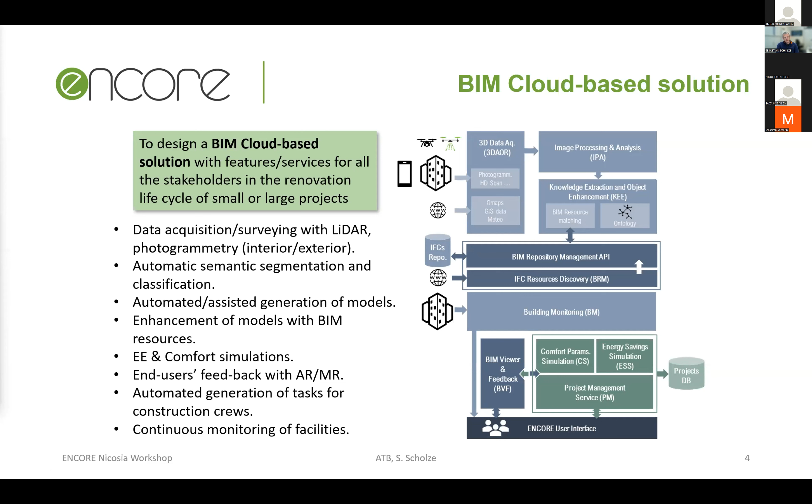So on the right side, you see the conceptual components that we wanted to address. And then in the last 3 years, we came up with an architecture. So we have a layered architecture. On the bottom, you see several data sources. So BIM objects, data from the drones, photogrammetry and LiDAR information, sensory information from the building, data from weather stations, but also online available data like Google Maps to get information from this.

The next layer is processing this raw data information. So to be able from this photogrammetry and LiDAR to create point clouds and photos and use these to create a BIM model, and also use the sensory information to enhance these BIM models. Then in this ENCORE engine layer, we are working on these data sets to get more meaningful data. And then on top, we have all these applications that I already mentioned on the slide before.

Okay, that's some sort of a software architecture, but renovating buildings is a quite complex process, so we also came up with an ENCORE workflow on how a renovation project should work. And you can see this here. So we are starting with creating a renovation project. Then you have to generate or add a building model, assess energy and comfort before renovation, then define renovation alternatives, and so on.

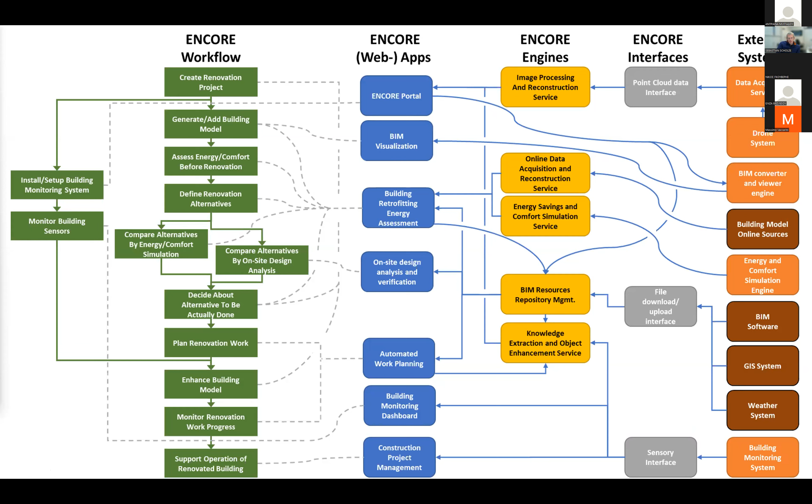And in the next slides, I will show you this ENCORE portal. That's the entry point for the integrated ENCORE solution. So it's a web-based solution. You can access it via any web browser, and then you can sign in. And the first thing that you see is the overview of your current renovation projects.

So for example, we are now in this project overview. The building monitoring is a building monitoring solution so that you can get live data from building sensors. This energy and comfort simulation can be executed from here. You can do a design analysis, the work planning, the monitoring, and this building operation support.

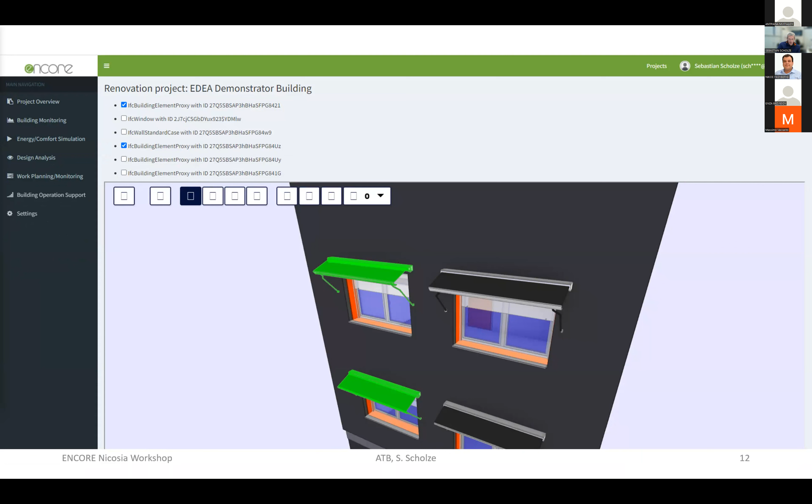If you have done this, in the background, there's an engine called Knowledge Extraction and Object Enhancement Service, and this is running continuously and trying to enhance these already existing IFC files, so the BIM model, and we are adding their semantic information. So, for example, we are trying to attach or connect installed sensors in the building with the objects to be renovated, and the result looks quite similar to

the one before. But what you can see here in these tags, that on top we have added here a sensor, so you know that with these objects some sensors are connected, and that's I think quite nice, because this is automatically done. So there's no need to manually update this information. Okay, that's the main part for this building.

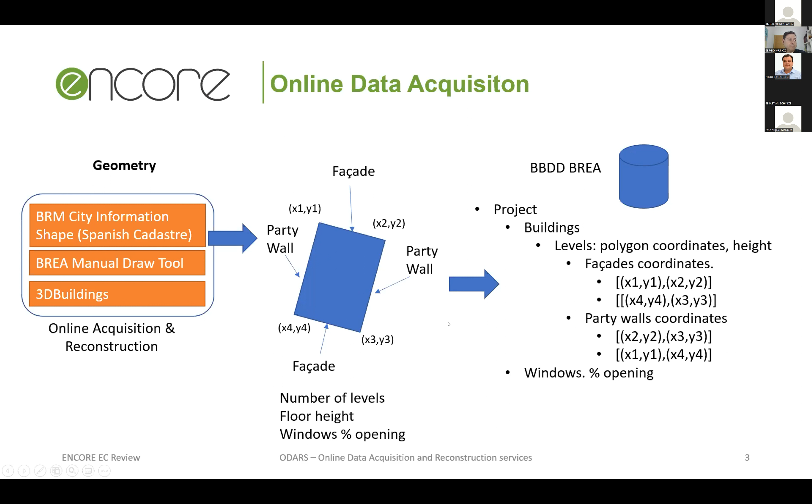So we need to take all the points of each facade, of each wall of the envelope. We need the information about the number of floors. We need the information about the floor height. We need to know the areas of the windows in each facade in order to create the geometry of our building information model. So I'm going to explain very briefly which information we have in each one of these sources.

So in the case of the Spanish cadastre, we have many shape files, one per municipality. We can take information about the polygon of each floor and the height of the building, and other interesting information like the year of construction, if there are some levels underground, for example, and information about the surrounding buildings. So here I'm showing you our database where we have stored the shape files of many towns in Spain.

So the second online source is 3D Buildings. It's a global database of buildings with different levels of detail depending on the country and cities. There are some cities and some countries with a good level of detail of the buildings, but in other cities or other parts of some cities, we don't have, for example, the information on the number of floors of the building. This is an example of the information that 3D Buildings has for Nicosia.

And finally, the last option is just to let the user draw manually using Google Maps as reference. He can draw the envelope of the building, indicate the floor height or the number of floors, indicate if a wall is a facade or a party wall, or add a courtyard, for example. So that's what we can do. We take this information in order to create the 3D model, extruding the floor polygon, taking into account the floor height.

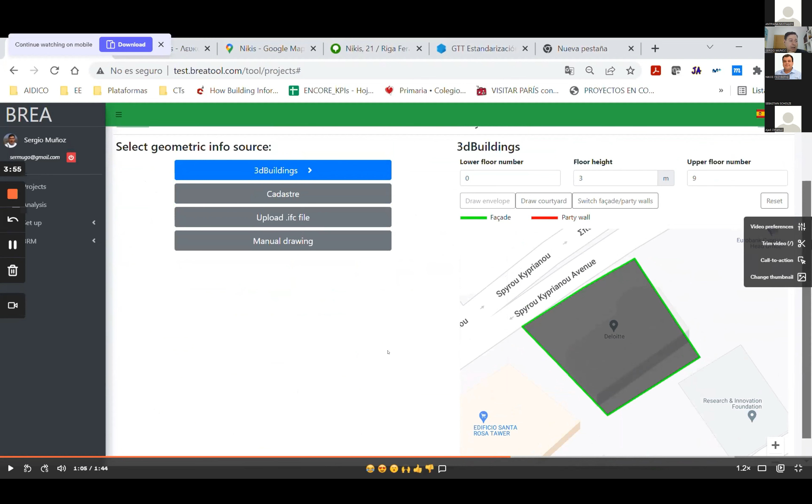Okay, so in this case, I select 3D Buildings as the online source. As you can see, the geometry provided by 3D Buildings is a little bit different than in the map. But I have the information about the number of floors of that building. So I assume that this geometry is correct, but if not, I can reset and draw manually. This is another part of the process that I will explain later, because we need to give additional information to our building information model. But the important thing is that finally we have this 3D building model for that building.

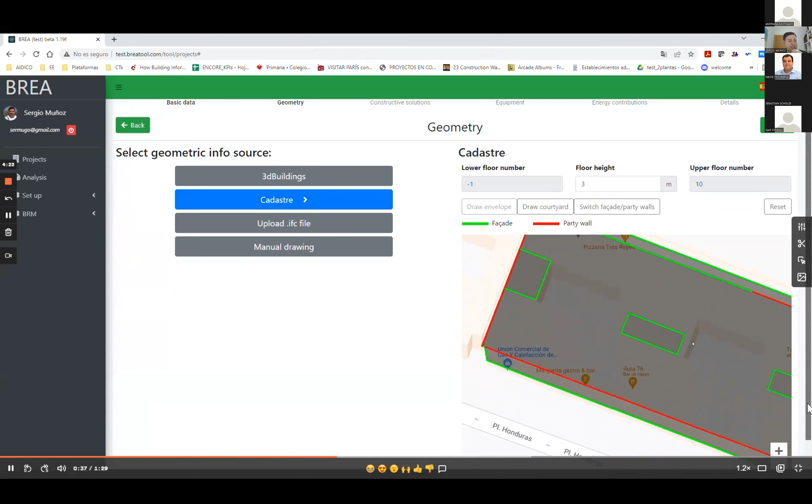So now I'm going to show you another example. In this case, we are going to use the Spanish cadastre. So I'm introducing an address in Valencia, in Spain, my city. Okay, I add some information about the climatic file. And here I select as online source the Spanish cadastre. And I get this information about the envelope. But for example, I don't get any information about the courtyard.

So I'm going to add a courtyard to this building. I have to specify on which floor the courtyard starts. So this is the courtyard. Okay, this is the same process to specify the technical requirements for the building. And finally, I have my 3D building information model for that building.

And finally, another example. In this case, I don't get information from 3D Buildings; it's another building in Nicosia. The address is Nikis 21. And I'm going to draw manually because I don't get information from the 3D Buildings API. But it's quite simple because in this case, I can use Google Maps as reference in order to draw the envelope of the building.

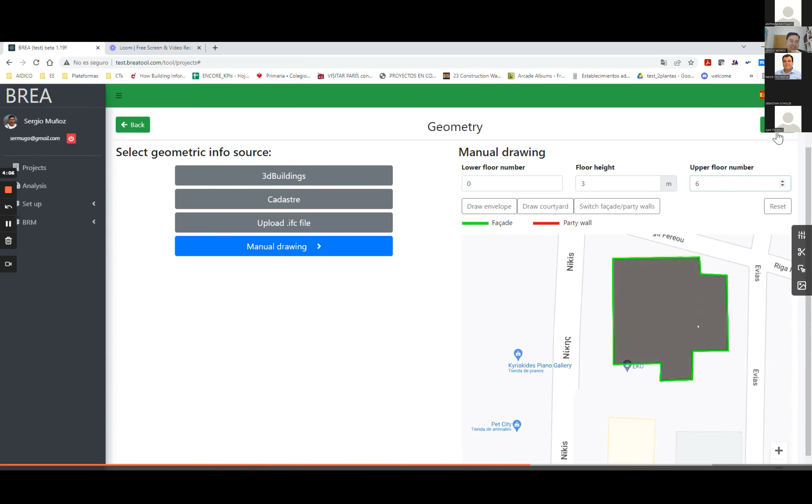I can specify the number of floors, for example, 6. I don't know if it has 6. I say which are the constructive solutions and the technical equipment of the building. And finally, I have the building information model. So let me.

So that's really all. What I wanted to explain to you is that this is possible because for making the energy assessment of the building it is enough to have the building envelope. We don't need information about all the internal walls of the building, for example. It's enough with the envelope of the building, and these online sources give us enough information to create this type of building information model.

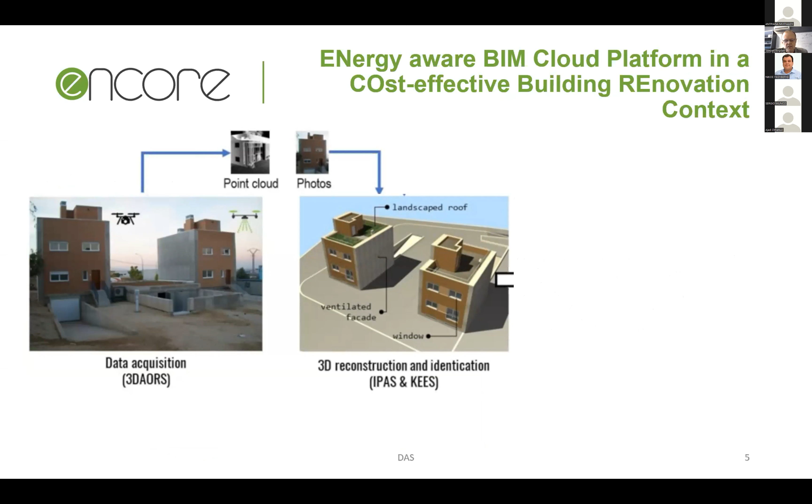So with our UAVs, as I will show you later on, we also use Google Maps and cadastre data. We find a building that we would like to scan with the UAVs. We are using LIDAR systems. Then we just mark points on the map, and based on those points, our vehicles fly around the building, collect data, and then those data are used to make 3D models. So this is actually the pipeline of ENCORE.

Now, in more detail, as Sergio already described, within Google Maps and cadastre, we find the building that we would like to scan and build a point cloud of. And many times the cadastre, for example here in Croatia, doesn't have as many details as the cadastre in Spain. For example, we don't know about the floors and much information is missing.

What we actually have, we have just layout of the building. And this is the first step. Our application just gets data from GMaps, the coordinates of the building, and those data are fused with the data from Cadastre. And then the operator just pinpoints waypoints that should be flown by vehicles in order to follow a particular trajectory.

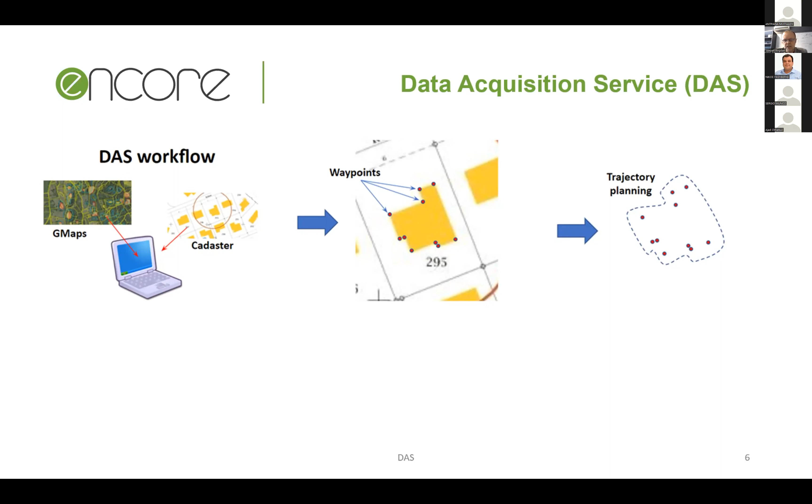Once those waypoints are set, then our system plans trajectory for UAVs, for drones, and we would like to do the scanning of the building with 2 or 3 UAVs. So not just with a single one, but in order to speed up the process, we use 2 or 3 UAVs, and our system plans those trajectories.

Then once trajectories are completed, vehicles autonomously take off, as you will see later on video clips that I will share with you. And all trajectories and all scanning is done autonomously without piloting the vehicles. Of course, there is always an operator there as a person that should take care if something goes wrong. If there is some malfunctioning of the system, then he or she takes over the UAV.

But if everything goes as it was planned, then at the end, the system would provide data sets with the point clouds that are later on in the ENCORE pipeline used for building a 3D model. Here are the components of the system. As I already said, there is a ground station which runs a human-machine interface, which is used by the operator to put all parameters of the system.

We have a communication part. We can communicate with UAVs by Wi-Fi, and also we are able to send images and point clouds over 4G or 5G. And we have 3 UAVs. This is the maximum number of UAVs. Of course, if there are some small buildings, all missions could be done also with a single UAV.

And on the UAV, we have a small onboard computer that actually calculates trajectory, plans wall following controller, attitude, and controls the vehicle. And then hardware, this is the vehicle that we are using. Here are the details. If anybody is interested, I can share with you later on or send you by email. It's a dedicated vehicle built for this purpose, equipped with all necessary sensors in order to provide autonomous flight of the vehicle. Payload could be up to 2 kilos.

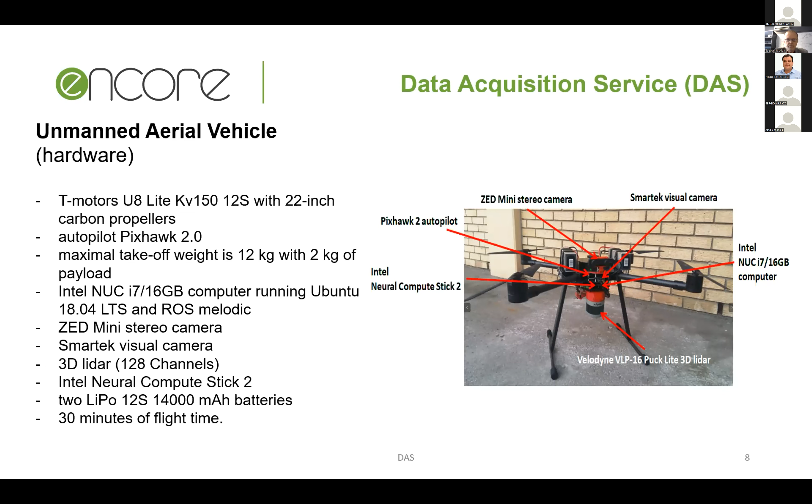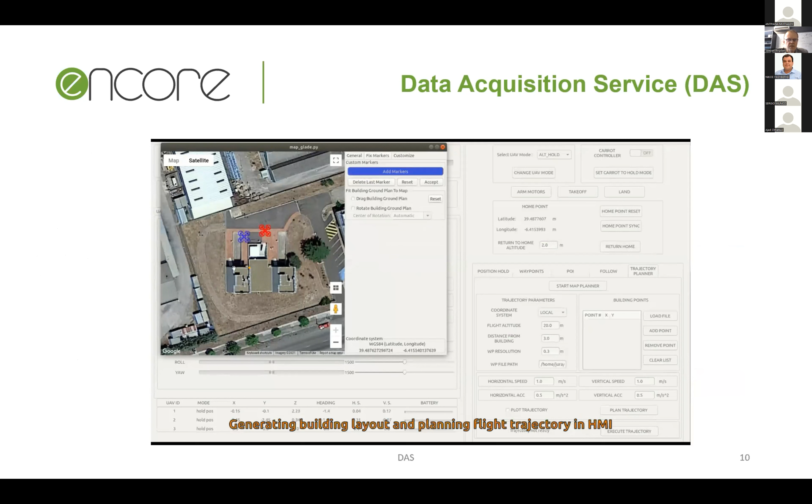And this is the process that I just explained with the human-machine interface. So as you can see, this is the building in Spain, in Cáceres. Now the operator sets 4 orange points around the building, and those points go to the trajectory planner. Then trajectories are planned. We have green, red, and blue UAV, and all data about position and orientation of UAVs are there. Once trajectories are calculated, as you can see, we have a blue and red one.

So 2 vehicles currently are scanning the building, and the operator could change the point of view, check if those trajectories are executed as planned. And also on another screen, the operator could see animation of the UAV that flies around the building. Here you can see how this blue vehicle is moving around the building following trajectory, and this red one is preparing for execution. And now both vehicles scan the building on opposite sides in order not to collide with each other.

So this is the operator's panel, and this is how the operator can check the status of the system. Also all numerical data, position of the vehicle, speed of the vehicle, GPS coordinates, everything is there on the screen, status of the battery, etc. Then, when this scanning is completed, also here you can see live how this looks from the ground station point of view. Blue and red vehicles. So the blue one just went behind the building, and the red one is over here.

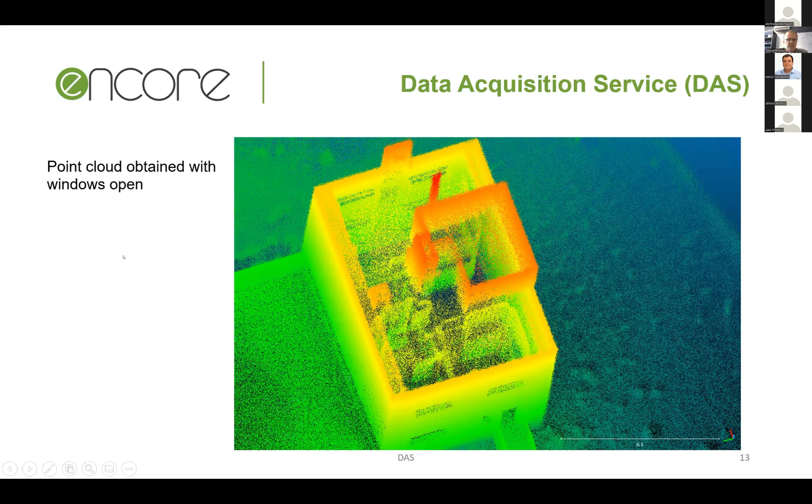And this is data that, after the mission is completed, the operator could receive, and then he or she could check if the precision of the following was okay. If it was not, for example, if it was poor weather, windy conditions, then he or she could repeat the procedure and make another scan.

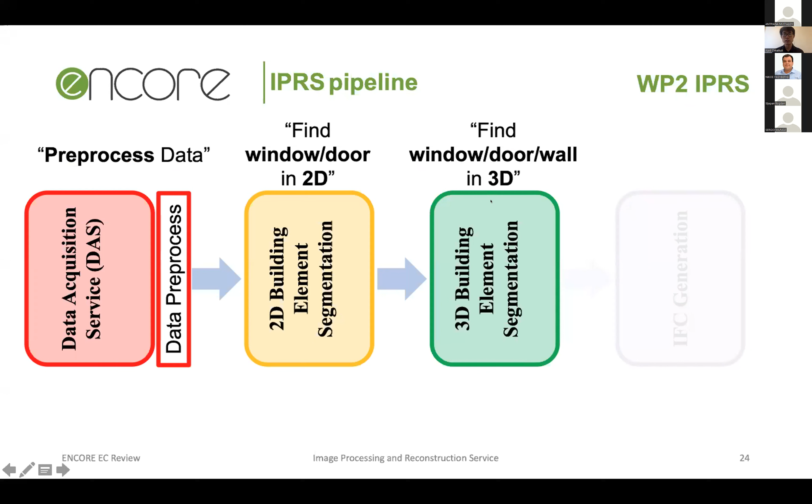The next module is the 3D building element semantic segmentation. The aim is to find the windows, the doors and the walls in 3D space. The techniques we use here are 2D to 3D mapping and 3D plane segmentation. In the 2D to 3D mapping, we back-project the 2D images segmented in the last module to 3D space to find the windows and the doors in the 3D point cloud. In our final full prototype, we already added the wall class, so we can also cluster the walls in 3D space.

For the walls, we have an additional technique, 3D plane segmentation, which aims at segmenting the planar parts of the 3D point cloud. So we can also exploit this technique to get the roof and the walls in 3D.

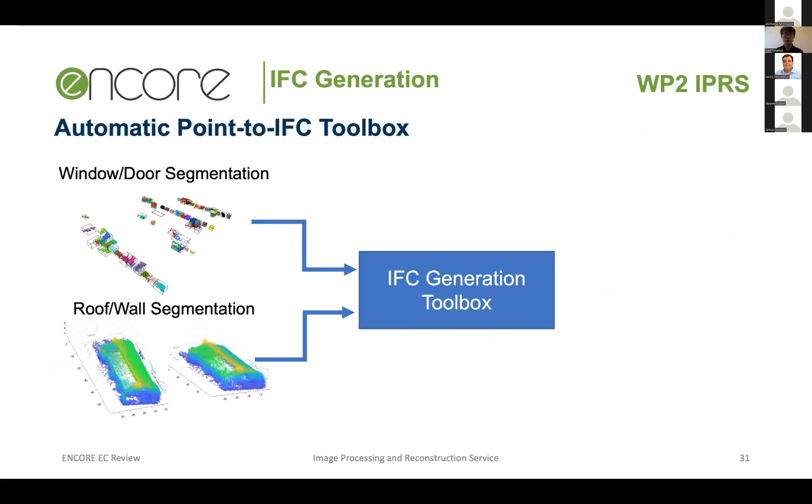In the final part, the IFC generation part, we include our segmented elements of the 3D point clouds, for example the windows, the doors and the walls in 3D space, and we input them into the IFC generation toolbox. Finally, we get the final IFC model automatically. It's the first automatic point-to-IFC toolbox, developed by our team.

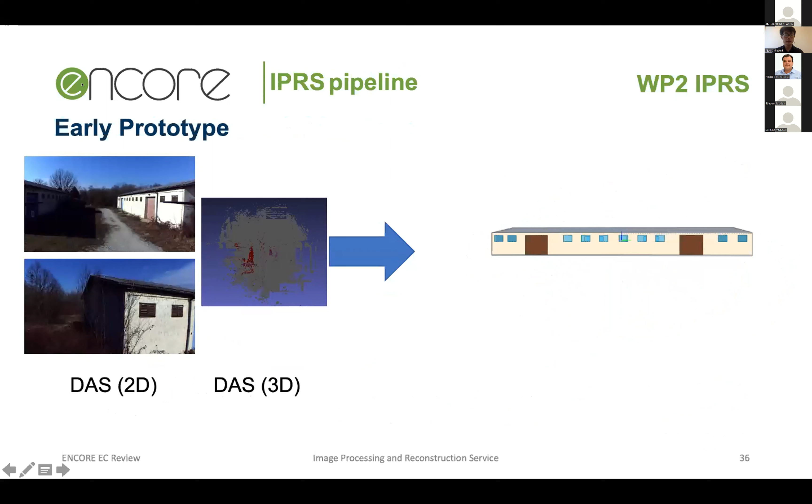And finally, we get the whole pipeline, which can receive the 2D images and 3D point clouds from the University of Zagreb team and produce the final IFC model. This is from the different buildings. In the full prototype, we verified our pipeline on the dataset collected from our testing building in Spain.

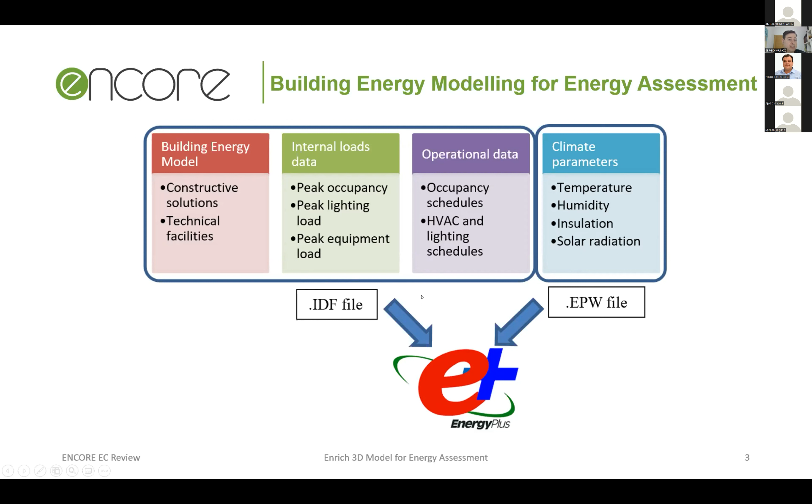So which type of information do we need? We have tried to be efficient in that way, and based on the European standard 17412, level of information needed, we have defined for each type of element which level of accuracy, with which detail, if we need the location, if we need alphanumeric information. So the level of accuracy for geometric information is different from the level of accuracy for the alphanumeric information.

Until now, we have information about the constructive solution, about the walls, the windows, and the floors, but only geometric information. So we have to enrich this information with the type of elements and some thermal properties. And additionally, we need to add to our model information related to the heating, the cooling, and the lighting systems. We don't need the geometry of these elements, but we need to know which type of facilities, and we need to know the performance or the efficiency power.

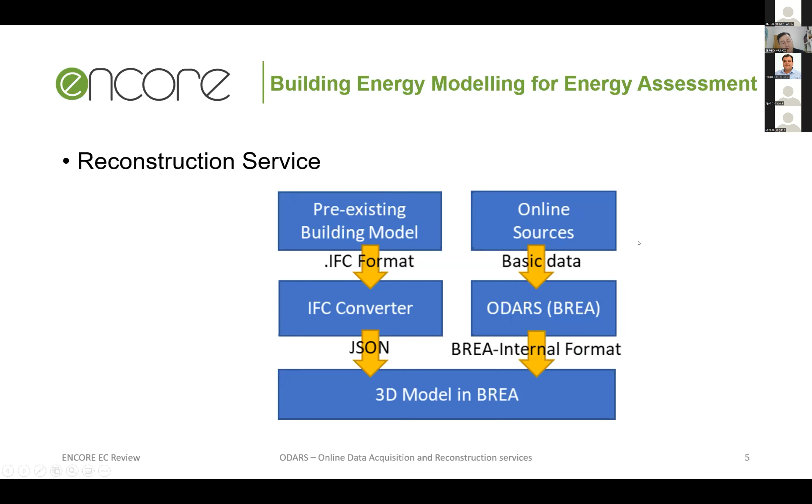So first, we have to convert the geometry from these IFC models to IDF, because IDF is the format that the EnergyPlus calculation engine uses. In this case it has been the people from the University of La Laguna, who will make a presentation later on, who developed this service, which takes the information from an IFC file in order to convert it to an IDF file. It takes the information from the envelope of the building, from the external walls, and from each slab of each floor, and converts it into the IDF structure.

As I told you before, we additionally need to add which type of materials, which type of walls, which type of windows, which type of heating or cooling technical facilities. So we have developed a database of BIM objects, which we can use to find which elements of the database are appropriate for our building. For example, regarding the constructive elements, we have a big database with walls, windows, roofs and slabs. Here we can see one of the facades of our database with all the layers, with the thermal and physical properties for each layer.

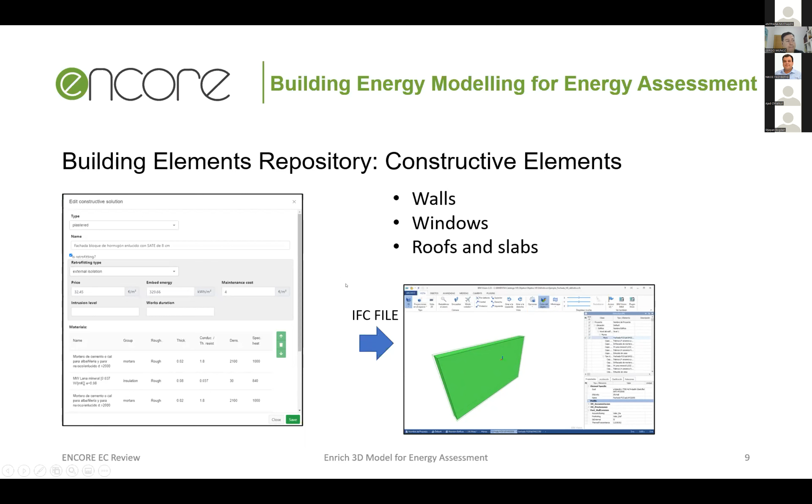Because we have a good database of different materials for walls, but for glazing too. And we have another database for technical facilities. It includes heating equipment, cooling, lighting, domestic hot water, ventilation, and building automation systems.

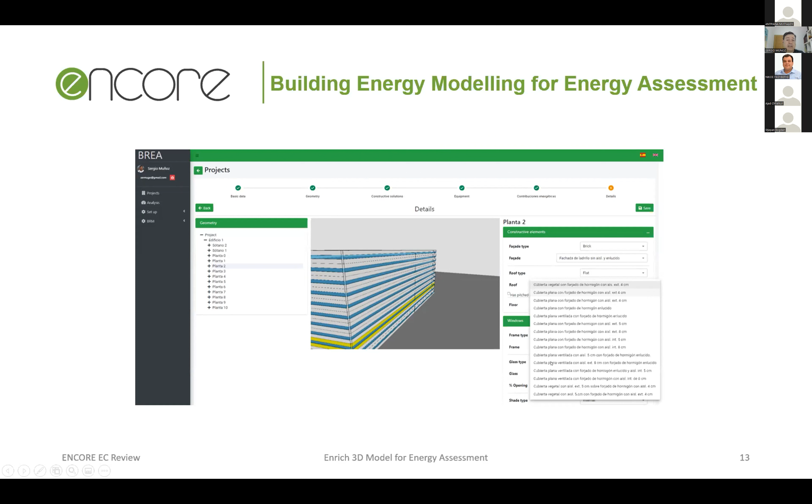So what we have to do, once we have converted the geometry to IDF format, is to select from our database the type of facade, the type of roofs, the type of windows, and the same for the technical equipment, in order to finally get the building energy model, which has not only the geometry information, but also information about the constructive elements for each floor and the technical facilities. So we can create the IDF file containing all this information to make the energy assessment that we will explain later in another presentation.

So I will try to show you very quickly two demos. I think I have to share this screen. So, okay, I created this geometry previously, but now here on the left side I can select the different floors, and on the right side I can select the different types of walls for each type of facade, for example. And later on, I just want to show you that I created the IDF file containing all this information. Okay, this is the file.

So now the second example. In this case, the geometry comes from an IFC file. This example is in Cáceres, in Spain. So I locate it on the map. And for the geometry, I select to upload an IFC file. Okay, this is the 2D plan for this building.

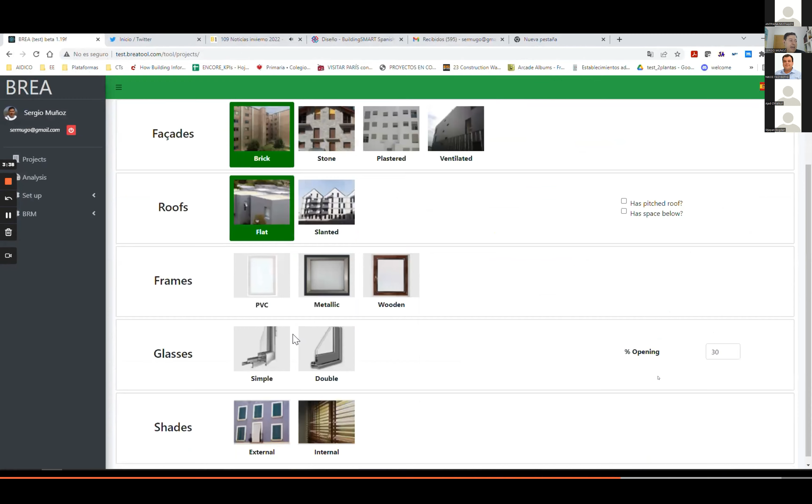In this case, I know that some external walls are not facades, they are party walls. So I'm going to manually select these ones and change them from facade to party walls. Okay, it's the last one, that's okay. And this is how I select, for example, the type of facade, the type of windows, and the same for the technical equipment.

Okay, this is the final result for the building energy model, not only geometry, so it includes these elements. And it was compared with the IFC file, opened in a BIM viewer. So later on, we will be able to make the energy assessment of the existing building.

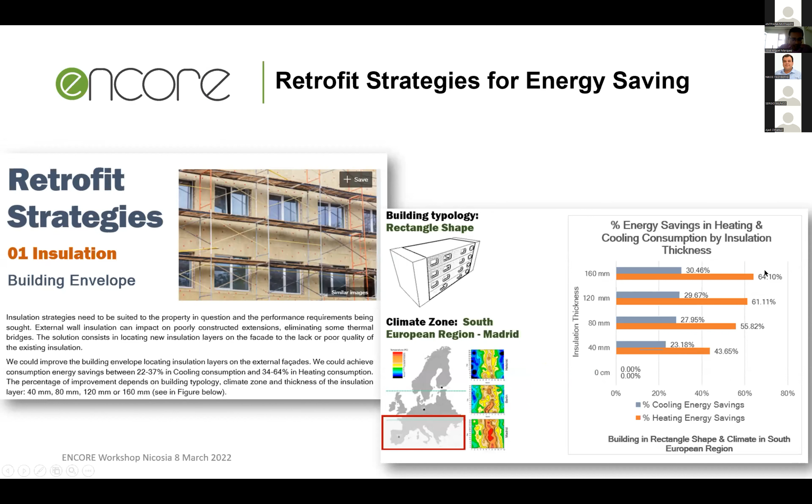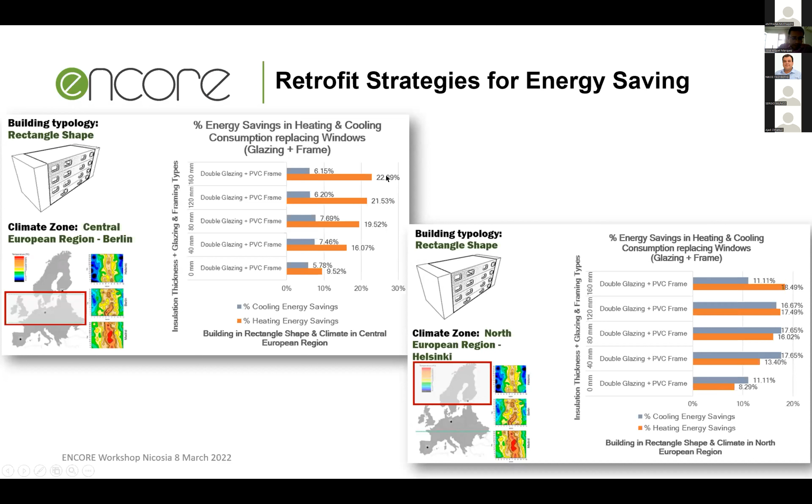In relation to the addition of external insulation in the building, here in Southern Europe, improvements between 40 and 64% are obtained, and between 35 and 50% in the case of Central and Northern Europe. The effects of window replacement depend on the insulation level in the building. In Southern Europe, replacing single glazing with double glazing leads to a heating improvement between 10 and 28%, more or less. And in Central and Northern Europe, between 8, here you can see, and 22%. The cooling improvements in these areas are not representative because, as mentioned before, there is no real demand of cooling in these places.

The combination of the two previous strategies offers improvements of 70% at maximum insulation level and almost 50% at minimum insulation level in Southern Europe. And these values range from 40 to 60% in Central and Northern Europe. Incorporating window shades in Southern Europe offers a maximum cooling improvement of 16%.

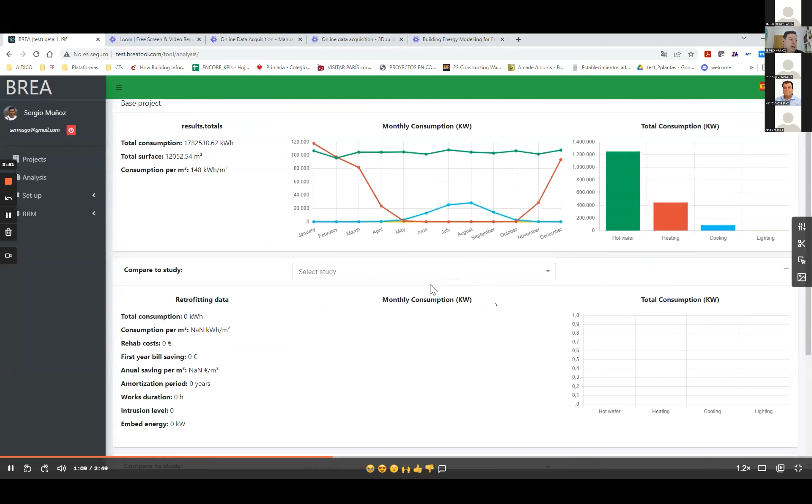So I'm going to replace the hot water type. It's an electric water heater, but I'm going to introduce another electric water heater a little bit more efficient, and I'm going to replace the lighting system by LEDs. So now I'm going to make the simulation. It takes a few seconds, and it depends on the complexity of the geometry of the building. That's not too complex, so it takes a few seconds.

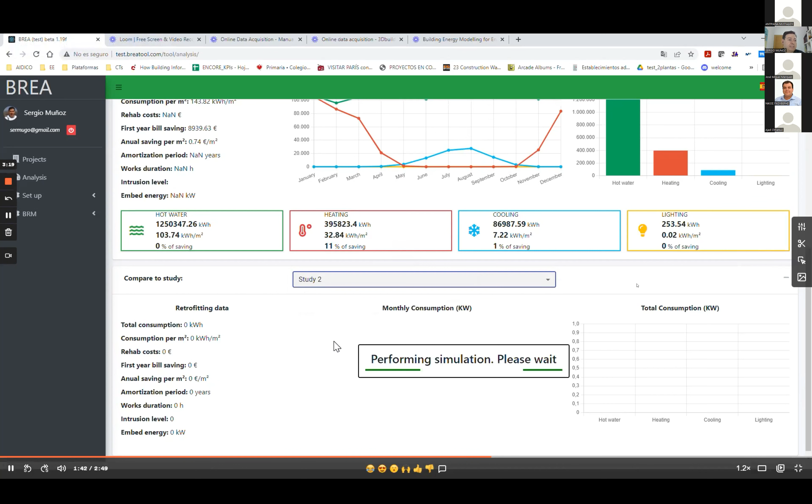So this is the case of study one, I've only improved the insulation of the facades. So I have 11% of savings in heating consumption. And in study two, I should have some improvements in the lighting and in the hot water consumption. In the case of lighting, I have 11% of savings, but in the case of hot water, I have very little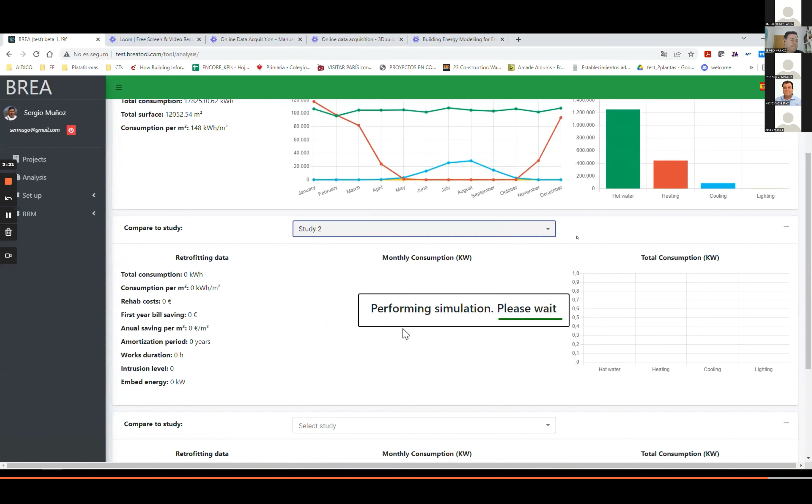savings. So I'm going to make another attempt, just editing this study two, and I'm going to replace the electric water heater by a domestic hot water condensing boiler, in order to see, using this more efficient equipment, which is the impact. So I make another simulation. Okay, in this case, it's 4% of saving in the hot water.

So we aim to give additional information relating to the payback or the works' duration. We have some information in our database, but we have to fill our database with some missing information about all the possibilities to give a complete report about the impact of each retrofitting study.

And that's all from my side in order to show you how we can quickly create different studies with different types of strategies in the passive part of the building or in the active part of the building in order to compare the impact using the simulation.

Thank you, Sergio. Following up, we are going to the on-site analysis and verification and the automated work planning, which is going to be presented by our colleagues in the Polytechnic University of Ancona in Italy. Dr. Alessandro Carbonari, the floor is yours. Thank you, Nikos.

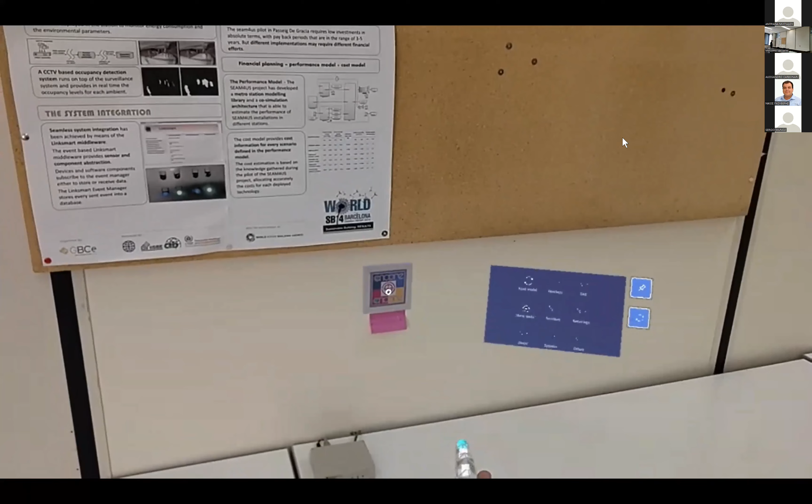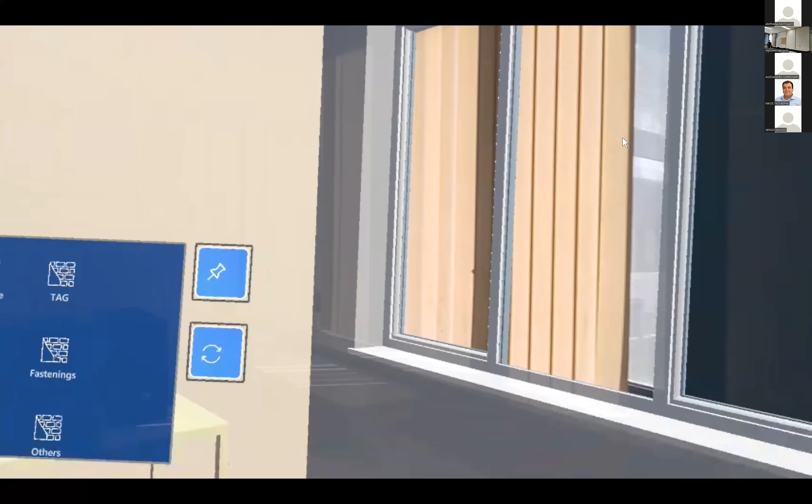Now the model has been displayed and is completely overlapped with the real world. As you can see, I can move around and see also the new furniture that is inserted in the renovation design. But what is more important is the new window, for instance. It is smaller than the actual one. And the new partition that reduces this space and creates another space on the other side that connects this room with the next one. You can see a new door there.

I can move. As you can see, the model is completely fixed in the real space. And I can look at the virtual objects as I look at the real objects. I can check the position of the door, the new corridor, and the door in front of me.

And in order to make a better assessment of the renovation option, it's useful to hide some components in order to see what is behind. For instance, I can hide the entire envelope. And now I can see also the furniture, for instance, of the other room that is not visible from this point normally. The new furniture inside this space.

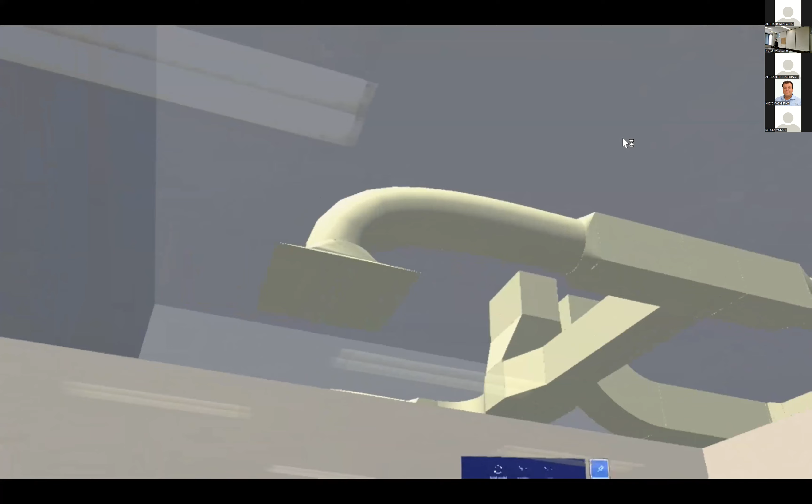For instance, here, as you can see, there is an outlet for the new ventilation system that is partly overlapped with the lighting appliance. Then maybe I want to leave a comment that tells the designer to change his design and to fix this problem.

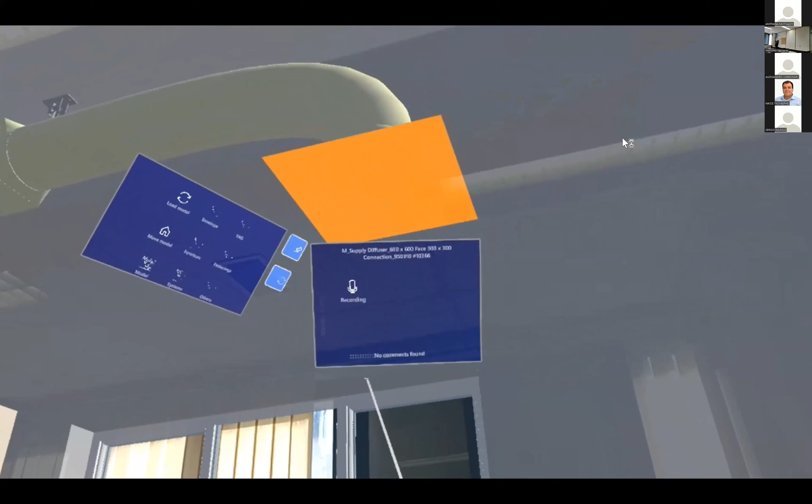I can select the object and I can record a voice comment. This outlet is partly overlapped with the lighting appliance. This outlet is...

That comment will be linked to the BIM object, the corresponding IFC object in the model, and that comment can be listened to by the designer in order to address the issue and solve this kind of problem. We could also leave other comments, for instance, attached to the new partition, the new door.

Also, it's possible to listen to comments left in the space by other actors, other experts that maybe are using the same platform. For this application, that's it. I can now get out from the application and share another window.

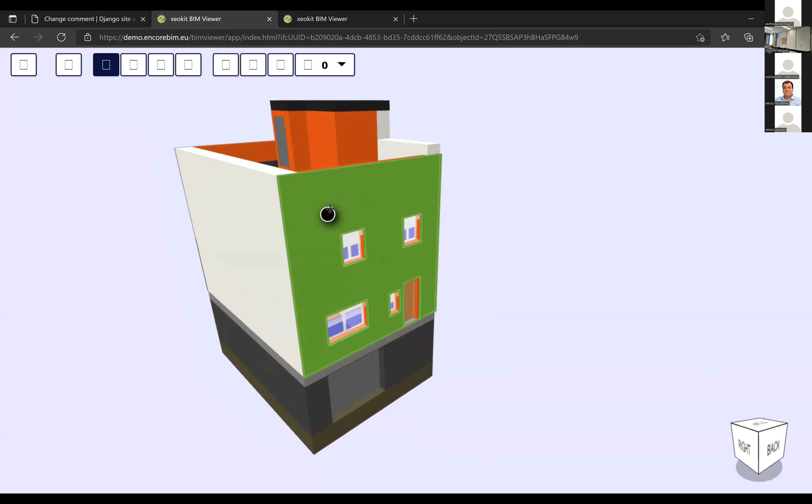This is a sample comment attached to an object that is identified by this GUID, this global identifier. And just by using this global identifier, we can link the comment to the corresponding IFC object, that is in this case, this wall of the case study.

And we can check, in effect, if the comment is relevant or maybe it can be neglected, or in some cases a new renovation option has to be designed that solves the issue.

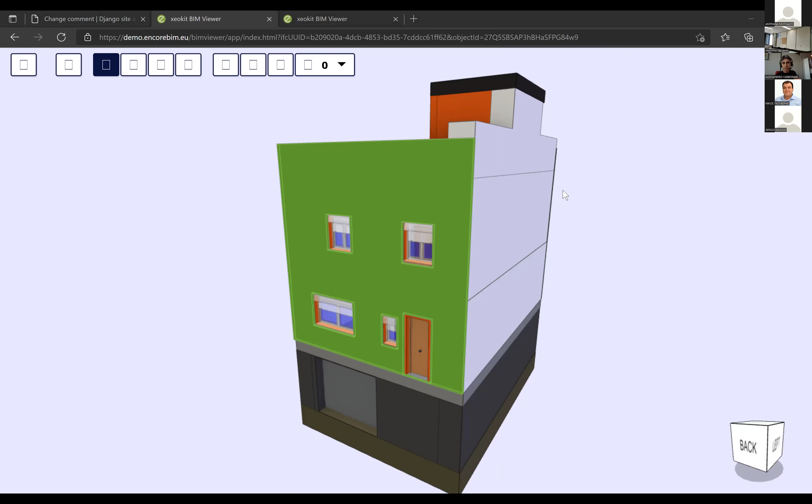Of course. Okay. And yeah, we'll try to share this one. Let's see. Oh no, sorry. All this problem with sharing the right window. Okay, let's try again. I suppose it's okay. Now you must be able to see the presentation that we've gone through earlier. Yes.

Okay, so I think Massimo has made the presentation about how it works and the role of the web service that was developed along with the application. Final words might be about the testing that we have done in our pilot in Cáceres, Spain. Just to say that it was tested by 8 volunteers, 8 people that have no specific technical knowledge about this

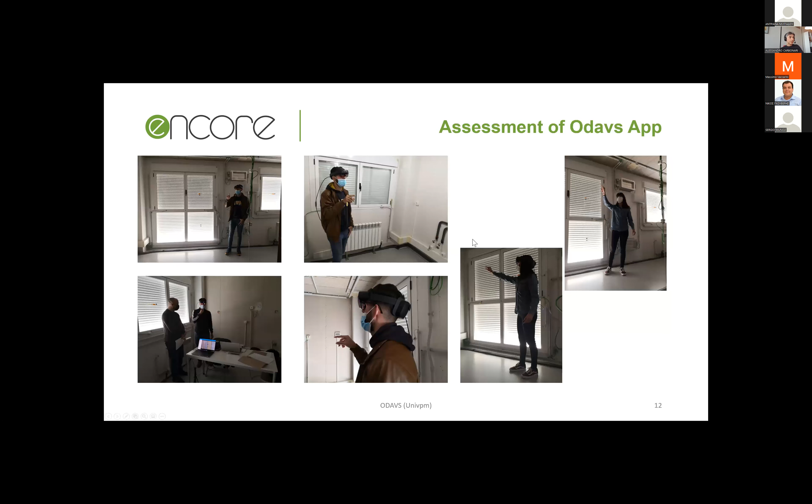system as Massimo has. So it was very useful to check how a technician and also not a technician can react and how fast people can learn about the use of this system. And we had very good feedback. The test took place in 2 different days. So we had one first model that was assessed in the first day, another model in the second day. We have recorded everything, so videos of their first person view and the comments that they left.

And also we have some statistical figures about what the answers are in terms of their technical assessment, but also their feeling with the system. And this was done about every step that they did and collected in a couple of questionnaires that are under analysis just in this period. So this shows that the system is suitable for people that usually perform their work in the field of building renovation. Okay, that's all from our side, and of course we would be happy to answer any question that

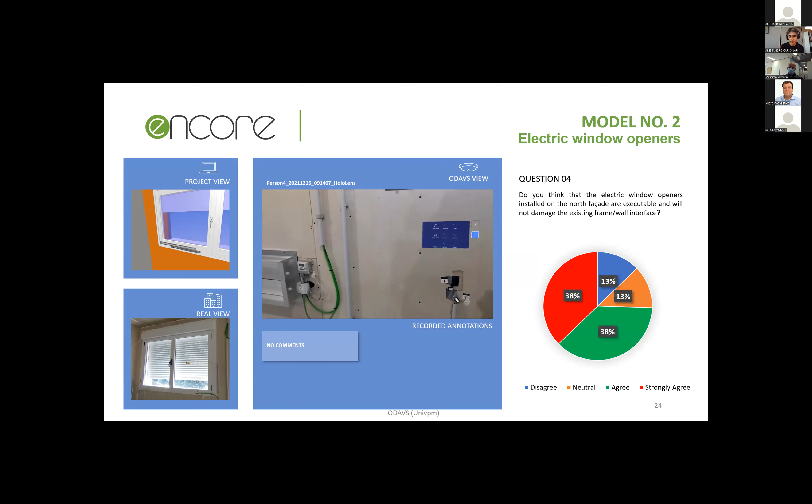We can proceed now to the last presentation of the ENCORE platform. Our last presenter today is Mr. Dulcidio Coelho, who is the technical manager of Smart Gateways, a company that is based in Manchester. Dulcidio is specialized in the field of electrical engineering and computer vision, and he is going to present us the building monitoring and diagnostics of the ENCORE platform. Dulcidio, I hope I got everything right.

The floor is yours. Okay, thank you for the kind presentation, Nikos. And as people usually say, leaving the best for last. So I actually need to lower down your expectations. This won't be the case. Can I just confirm that you're seeing my presentation correctly? Yeah, Dulcidio, we can see it. Okay, thank you so much.

So I'm going to give you just a brief presentation, I hope, at least. So let's just start by giving you a very short foreword in terms of the 2 SMEs that are developing this module for the ENCORE project. So as Nikos said, I work for Smart Gateways. Actually, I'm one of the directors. And we are working in partnership with a Portuguese company called SPA. Both very small companies, but with an interesting track record in terms of European projects as well.

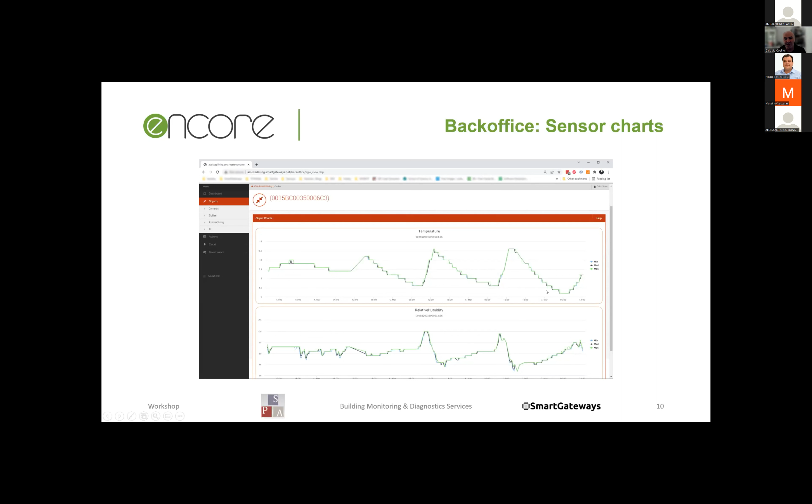The second endpoint is called gateways. You can have access to one gateway, or if you are a building manager and you have a series of buildings under your supervision, you can have a range of gateways available to you. You can use that endpoint to query which gateways you have access to and, for example, their location, so that you have an ID for that gateway that you can then use to query the sensors.

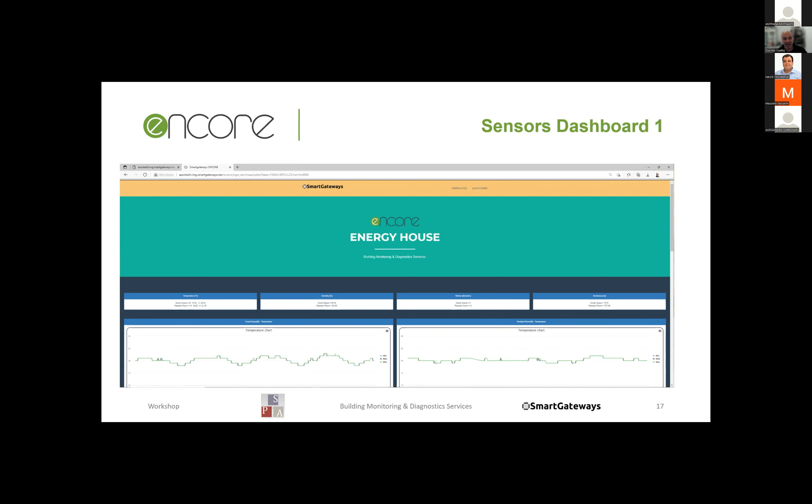So the dashboard itself, the first line, you can see there is a range of sensor types, and it's showing actually current readings for those sensors. As you move down on the dashboard, you see the graph for the period you select. So in this case, you're looking at temperature and humidity charts. You're also looking into occupancy. So as we provide some motion detection sensors, this allows us to understand the time of use of the different spaces.

For example, you can see on the first motion map, there's activity starting at 6 a.m. So basically, if this is a working space, it will allow you to understand that there's nobody using that location before. So your comfort parameters can be adjusted for no people in there. So you can reduce the temperature or the cooling, the lighting, and so on. So this allows you to understand the occupation pattern for spaces and adjust your control algorithm to take that into consideration. Same goes for illuminance, as you can see on the bottom.

Of course, because again, it's doing that in 15-minute periods, that's why you see huge variations between the average and the minimum and maximum readings. Because these may include sunlight interfering, if the sun shines brighter during those 15 minutes, you'll get a really big spike. But that is also a good indication of how a space has been used, and it also allows you to understand the interference of natural light within your environment.

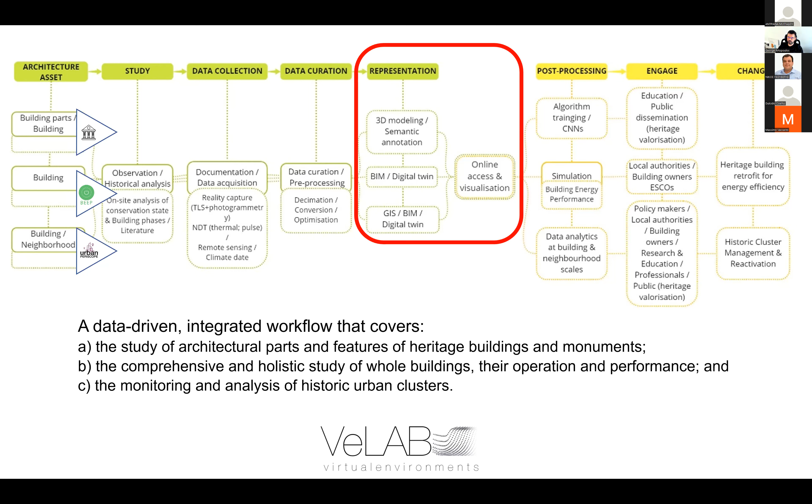In this context, we decided to present a couple of our ongoing projects, our current research activities, which cover different scales, as I mentioned. And as you will see, they are in many ways and at different levels very complementary to the fantastic work that the ENCORE Consortium is developing. Obviously, there are some anchors, some overlaps, and these regard specifically the use of building information modeling platforms for accessing this wealth of data. So in this framework, I would like to start with a presentation of one of our projects that focuses on the monitoring of historic clusters.

And this is an area where our activities differ from the operation, the focus and scope of the ENCORE Consortium. Before getting into more details about the project, I think it is worth offering a glimpse of the motivation behind these activities, which stems from the everyday reality and the challenges that we are facing in the so-called second and third tier historic cities across Europe. This is important because these are cities which, unlike cities such as Bristol, Vienna, Barcelona or London, are lagging behind in terms of smart city tools and all the capacities that these bring. And you will allow me to explain what I mean.

So, to bring you the Cypriot context, even though in Cyprus most, if not all, of the authorities and stakeholders do recognize the very positive impact that local heritage assets have on the successful urban regeneration of our cities in terms of their socioeconomic benefits, we are still facing the loss of our built heritage every day. This is the result of various causes, including pressures from real estate development, neglect by the owners, and the impact of climate anomalies, which is a reality especially for the solar belt and our region in the Middle East, which is, as you know, a climate hotspot.

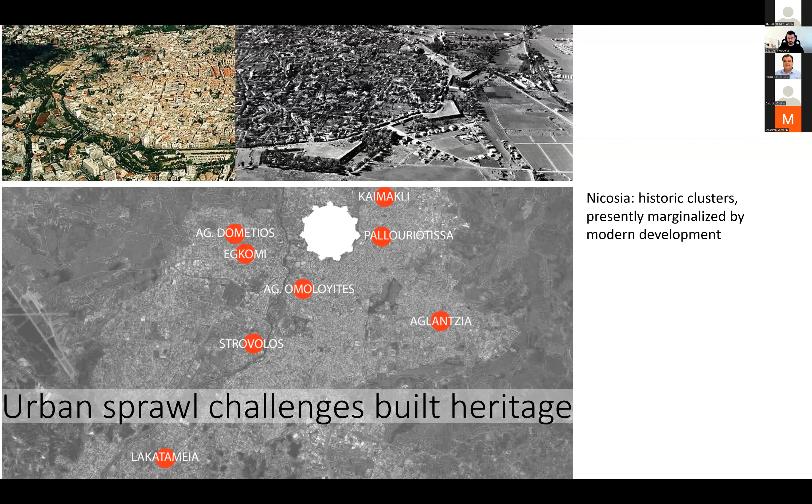Another important pressure in such cities is the result of very rapid urban development, which in some cases was also unplanned, as you see in the case of Nicosia, where all the satellite historic villages around the city have been integrated into the urban fabric due to urban sprawl. So, as I said, everybody acknowledges the positive impact that investing in built heritage and reuse could have in our cities. It is also well understood that in the context of the Green Deal and the targets that the European Commission has enforced, there will be a huge need for renovating our building stock.

Still, we have a long way to go to be able to offer all the stakeholders the necessary tools that they could really implement in practice to help address this problem. So our project was motivated by the urgency of safeguarding our building stock, the proven socioeconomic benefits of reusing and conserving built heritage and heritage buildings, and the expected need for renovation.

And it identified specifically the gap and therefore the challenges, which in terms of the level of the authorities can be focused on the lack of data by the authorities, which of course doesn't help them to really address the issue on an individual scale of the building, but also the tools in terms of monitoring at a different scale, as you will see later on.

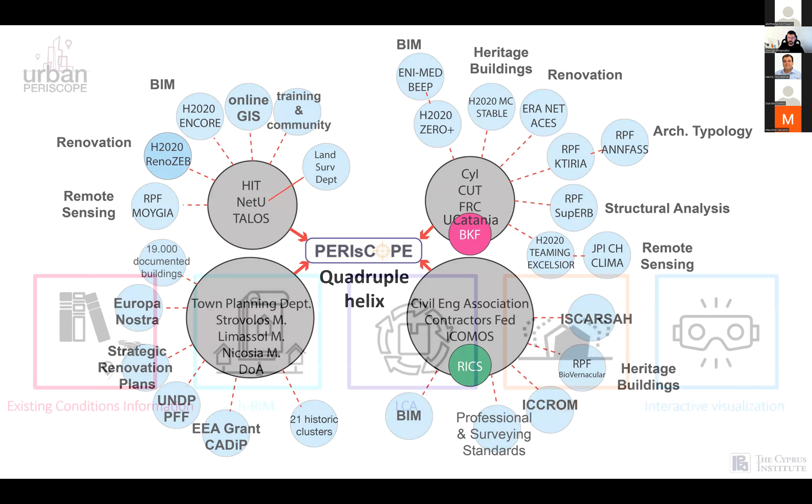and produce an online BIM-enabled platform that would help both the officers of the local authorities, as well as the practitioners and the owners of the buildings, to embrace this transformation and this change, and give them the capacities to have access to such data.

So in this effort, similarly to ENCORE, we tried to bring together the data that were generated by documentation on the site, with LCA, life cycle assessment information, as well as non-destructive testing techniques that would enable the building owners and the professionals to better understand the specific structural issues and the material construction issues that their specific building might have,

and to provide access to all these data sets through the use of a building information modeling platform, where the central role, of course, is played by the IFC file that links all these data together, as well as providing access for remote collaboration through a digital twin of the building.

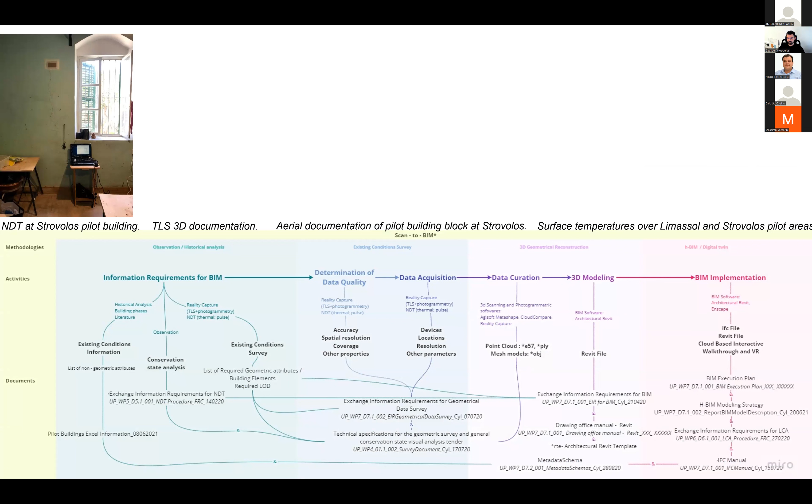I just want to mention the integrated process that we are following, that combines, as I mentioned, non-destructive testing information from the buildings, with terrestrial 3D documentation, as well as aerial documentation, but also the results of remote sensing study of the specific areas to which the buildings belong. And I will be talking more about that in a while.

So as I mentioned earlier, our focus, unlike the ENCORE project, lies mostly on creating this platform with these features and tools and the data sets for the specific buildings, as a means, as a vehicle to demonstrate to the local authorities and the practitioners the importance and the value of approaching the challenges of our built environment through the use of said tools.

And therefore, what we needed was the development of the relevant workflows and guidelines and instructions for each one of these target audiences in order to enable them to embrace these technologies. So in this context, our focus was on how the several activities would link together in terms of the interoperability of the data and the data provenance.

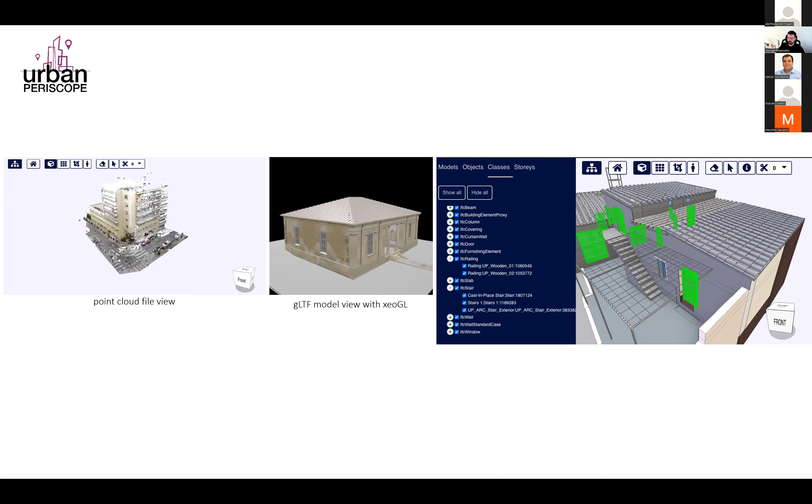Regarding the point cloud and the whole process of creating the building information model of our pilot buildings, naturally, we have been similarly exploring different possibilities for semi-automating the process, or at least to better understand what this would take. But specifically, since we are focusing on historic buildings, we were fully aware of the difficulties that actually segmenting and annotating the very complex and irregular geometry of heritage buildings could pose a serious challenge in trying to automate this process.

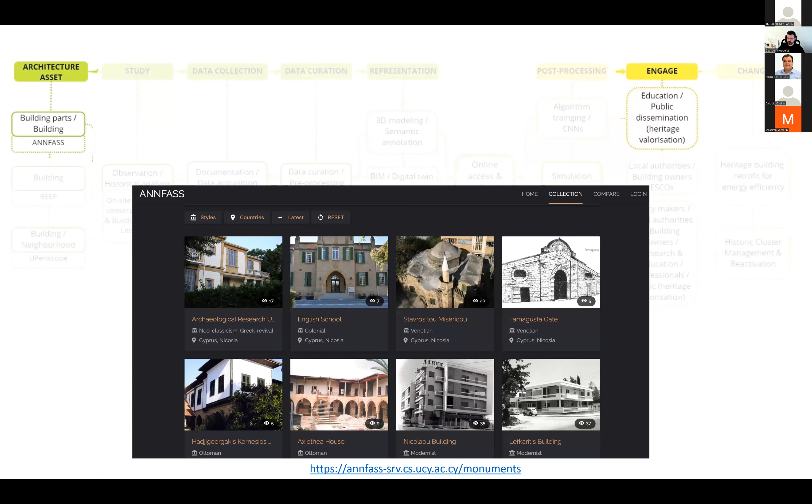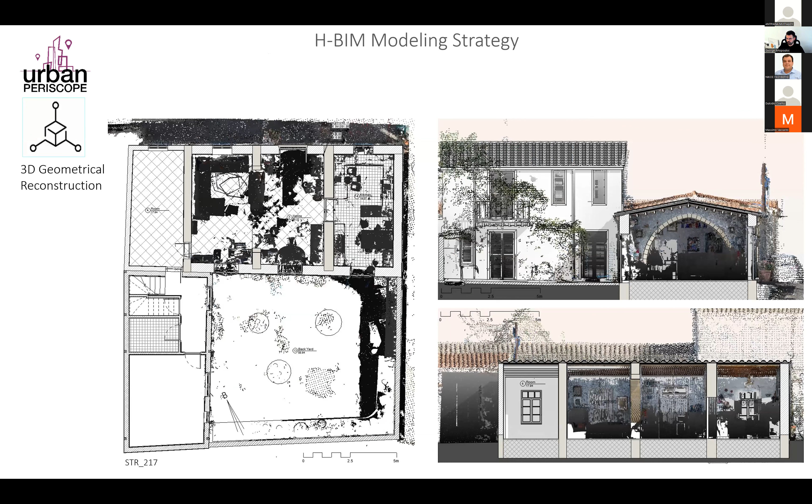integrated in the process. However, exactly because of the practical difficulties of the complexity of the geometry, we followed a manual process of building the BIM model by snapping on top of the 3D point clouds, and mostly focusing on the textures, on the materiality of the building, exactly because of the importance and the central role that the conservation state analysis process would play in our field.

Naturally, we have been developing families for each one of the objects in the BIM model that could be reused. And as I mentioned, again, the effort was for us to produce the data sets that could become useful in the future for both the professionals who are active in building conservation and renovation, but also for the officers of the relevant authorities. And this is why we have stakeholders such as the municipalities and the Town Planning and Housing Department as partners in our consortium.

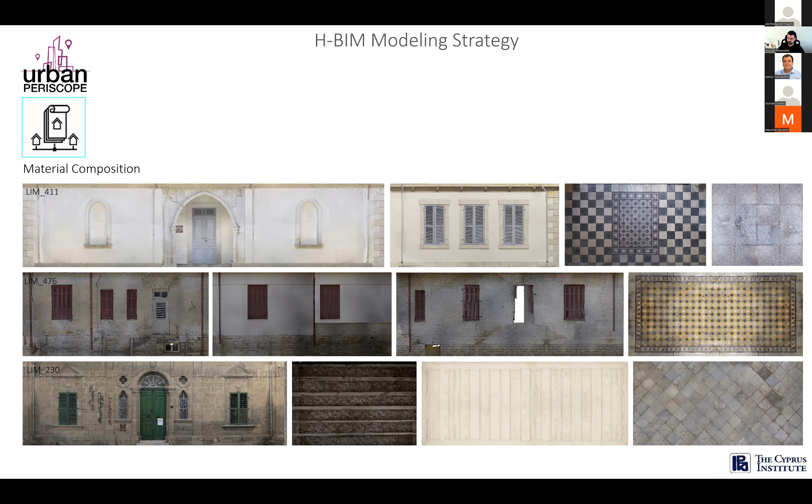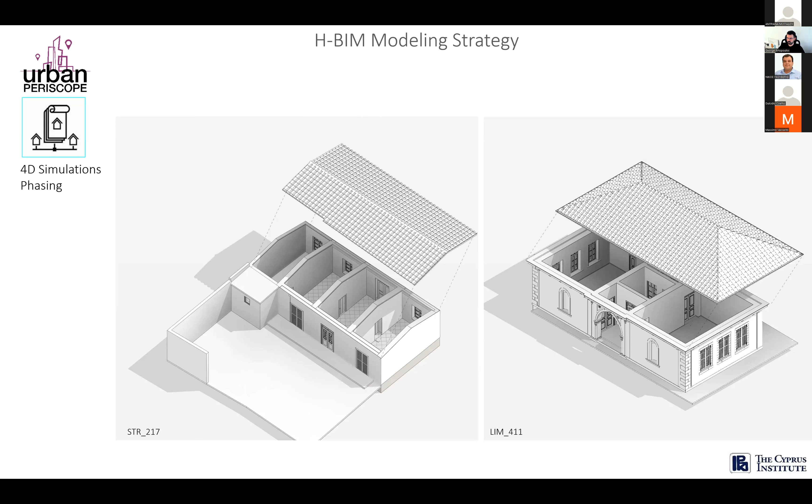And you see here some of the material databases that we are creating. And of course, this tool would allow for representing the phases of the building, as well as a better analysis of the typology of the buildings. And besides, as I mentioned, the conservation state analysis with the use of typical documentation processes and representation tools, we also focus on providing online access to this information for the collaborating stakeholders and partners.

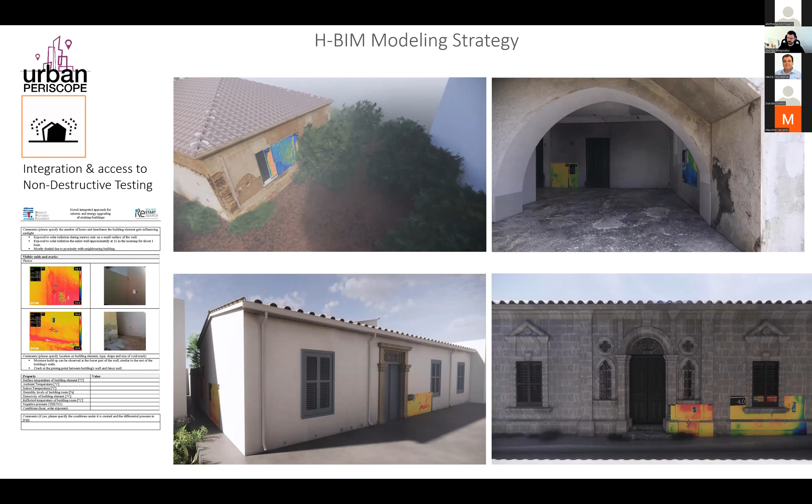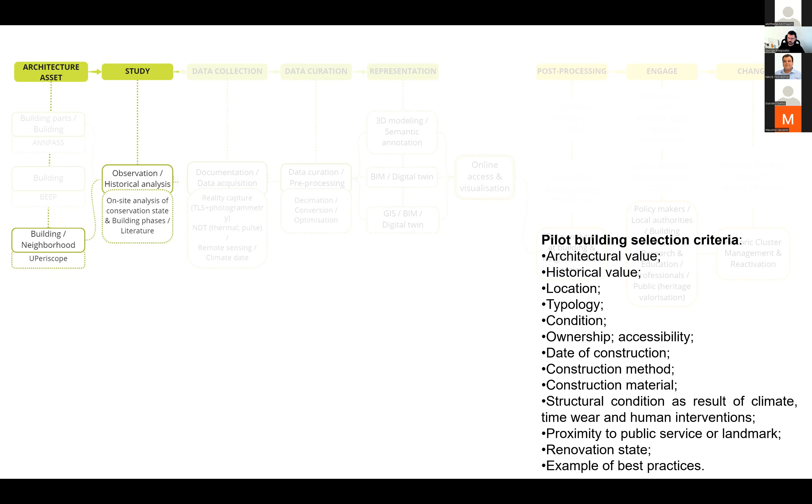And multiplying this process to better understand the value and the activities or the interest that might have been taking place in specific historic clusters in our cities is becoming a reality, and it's elaborated through the study of several such cases, such buildings that were carefully selected based on specific criteria that you see here, including, of course, architectural, historical value, location, typology, condition, etc.

And in applying this, we decided to focus on two different areas in Cyprus, specifically in the Turkish Cypriot quarters of Limassol and in the Strovolos area in Nicosia near the linear park of Pediaeus, because these areas not only are populated by different types of heritage buildings with different typology, as well as different construction methods and materials, but also because they represent different social conditions, specifically in the case of the Turkish Cypriot quarter in Limassol.

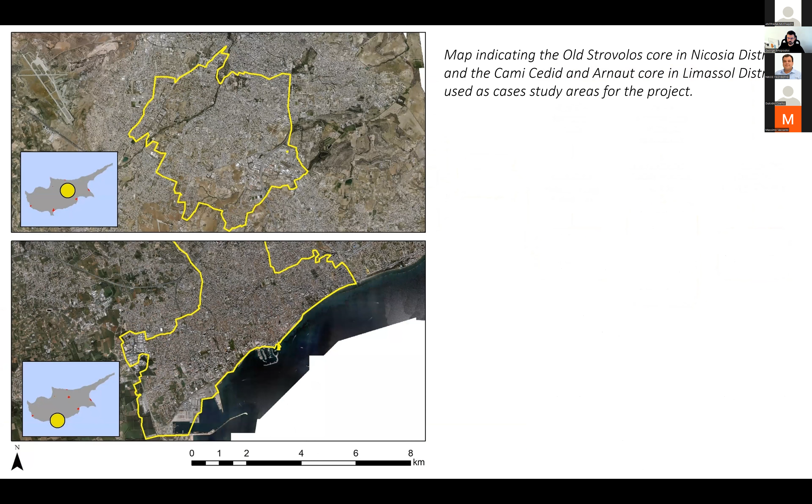And moving to the next scale, these are the two case study areas, to our next scale, which is that of the neighborhood. Of course, we used aerial photogrammetry, aerial documentation techniques in order to cover the surrounding structures and buildings of the specific pilot cases that we are focusing on.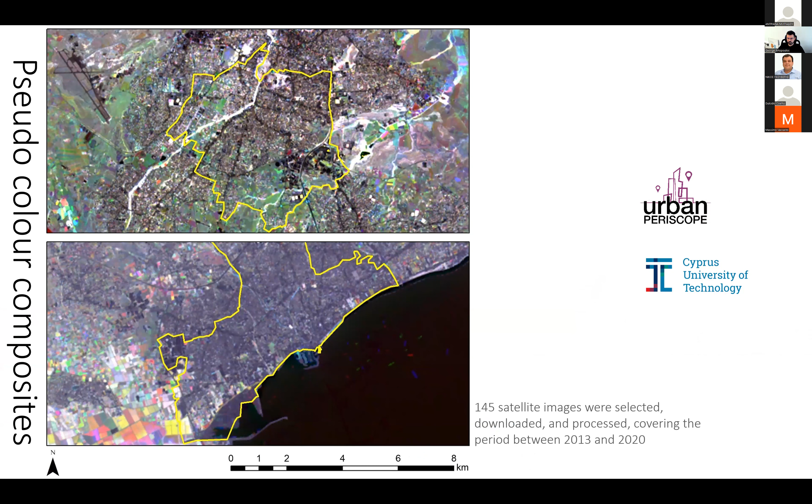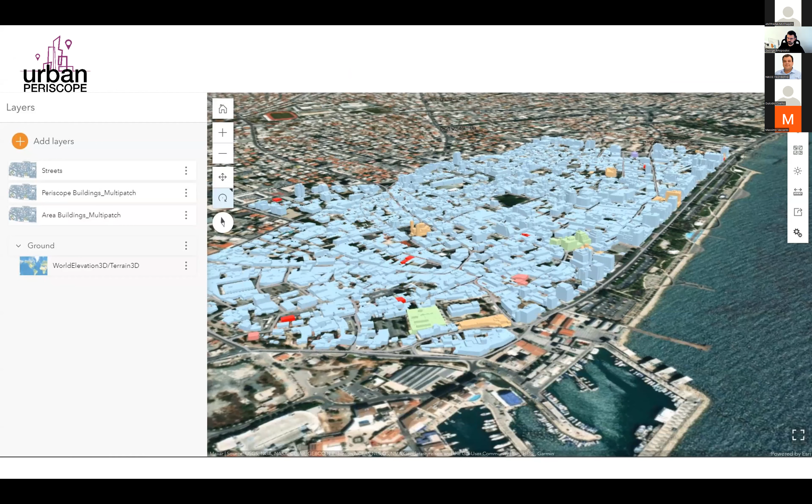And further on, we integrate the results of data analysis of remote sensing in both areas, specifically in terms of the land surface temperature, in order to enable the relevant users to have access to this information through a GIS-based platform, and therefore to move from a purely visualization tool like the one that you just see here, which was created

in Unity, into a GIS and BIM integrated tool that not only offers dynamic access to dynamically updated data sets about the built environment, but also access to the documented point clouds in the scale of the building block, and to BIM models in the scale of the particular building, but also doing so by providing access

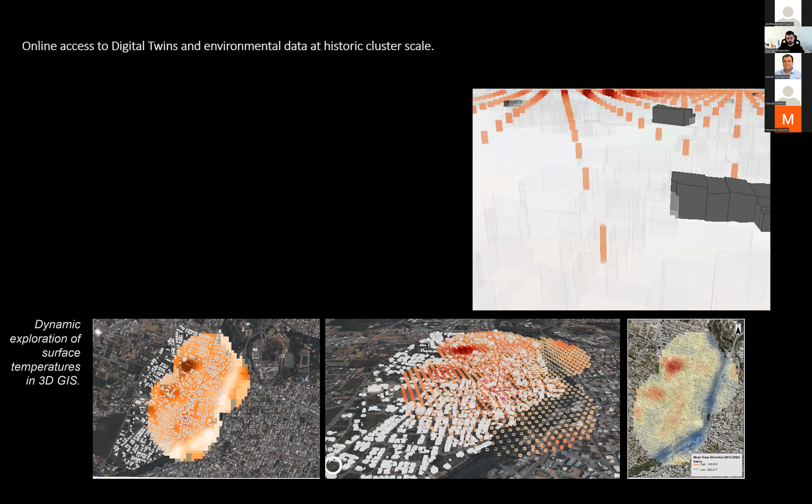to neighborhood scale data, environmental data that would help all the relevant engaged professionals to better understand the impact that a long-term exposure of specific materials and constructions would have to the climate of the specific environment. And with this, I will stop.

These are the results of the project, and this is how we respond to the targeted needs of each one of our user groups: by enabling planning and better monitoring through linked data to the public authorities and policymakers, by providing all the good practices, instructions, and guidelines to professionals so that they can develop further on similar data sets that

would be automatically uploaded on the platform, and also by providing renovation guidelines and examples to the owners to facilitate and help them gain a better understanding of the cultural and social value, as well as the economic value of renovating and conserving their properties.

And I will stop here and pass the floor to my colleagues, Stavroula and Christis, who will be presenting to you the work that we have been developing and conducting in the context of another European project.

Yes, hello from my part. Can you hear me? Yes, yes, we can hear you. And you can also see my screen, I guess. Yes. Right, just give me a second. Okay.

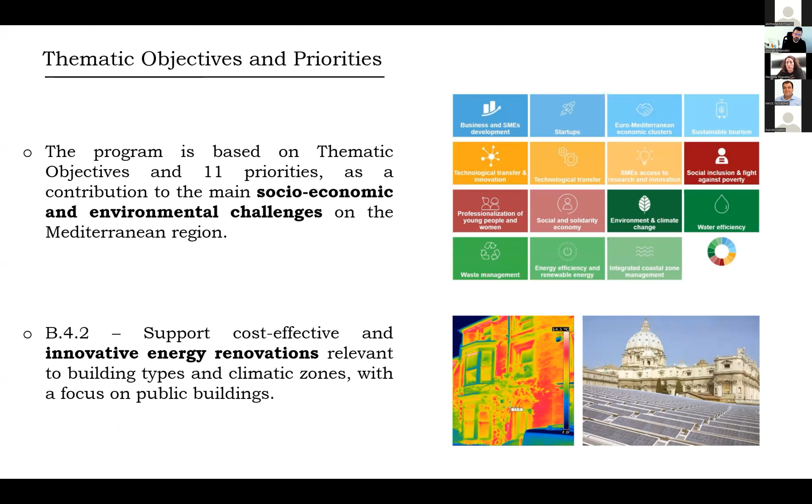The thematic objective and priority of this program is to support cost-effective and innovative energy renovations with a focus on public buildings. More specifically, the BEEP project aims at strengthening the use of BIM tools to enhance energy efficiency in buildings.

The expected outcomes of the program will provide public administrations with a powerful method to be used in the energy rehabilitation of public buildings and support the whole process of finding private funds through the energy performance contracting scheme. This innovative methodology is tested on heritage public buildings, and this is what makes this project very interesting and also very challenging, not only in terms of interoperability, but also in terms of methodology.

So the first step of this methodology involves the elaboration and incorporation of various data sets. The first one, as you can see here, concerns building assets, heritage significance, and conservation state. Also environmental aspects such as climate data and energy audit of the building. The second stage involves dynamic energy simulation and the sixth dimension of BIM.

Passing on to the creation of an enriched energy efficiency BIM model with the extraction and the calculation of other parameters such as the return of investment, and elaborating and enabling the process of attracting ESCOs and obtaining an EPC contract.

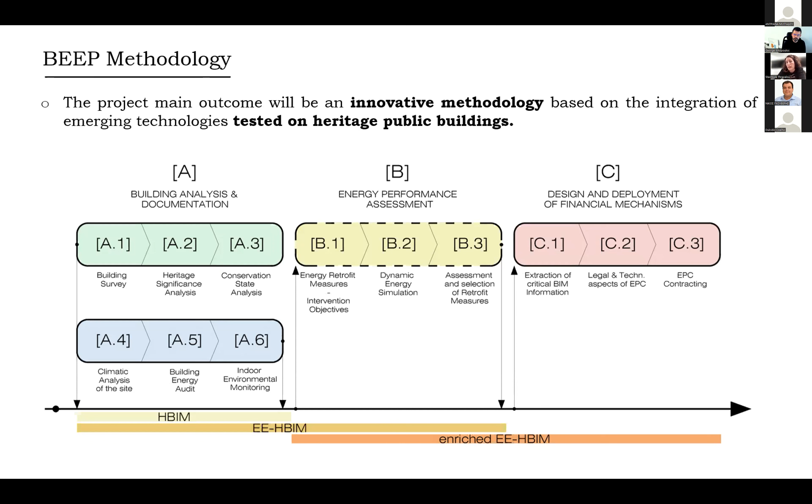So the pilot case study in Nicosia is a building that has been abandoned many years now. It has influences from the British colonial architecture. It is going to be renovated as a municipal museum.

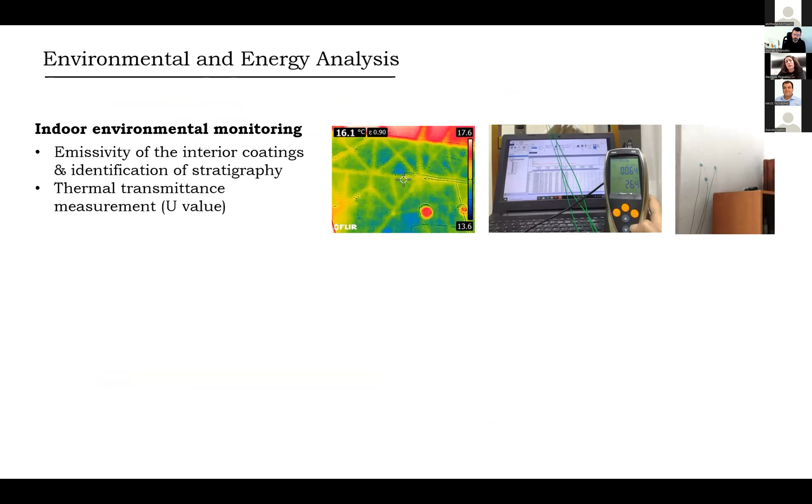So once we had the BIM model created in the platform, we also incorporated a number of data that are related to occupancy schedules, HVAC and lighting schedules, but also the thermal properties of the materials and the building components that are also represented here.

So having created the energy efficiency BIM model and passing on to the next stage, that is the dynamic energy simulation of the building, we have encountered a series of challenges. And at this point, I would like to give the floor to my colleague, Christis Alexandrou, to enlighten you further.

Hi, everyone. As previous speakers also mentioned, interoperability is a challenging chapter. First of all, our audience should know that this is a topic that concerns the research community, and of course BIM, a method that is supposed to boost collaboration between all the involved parties in constructing buildings.

The objective here is to turn it from a semi-automatic approach to a fully automatic approach. This will, of course, avoid any unnecessary remodeling between the architect and the energy engineer, and at the same time will ensure that there are no errors in data registration during the process. Above all, solving this issue will enable the full utilization of BIM parametric capabilities, and then will open the road for design optimizations, whether these concern the building or its energy performance.

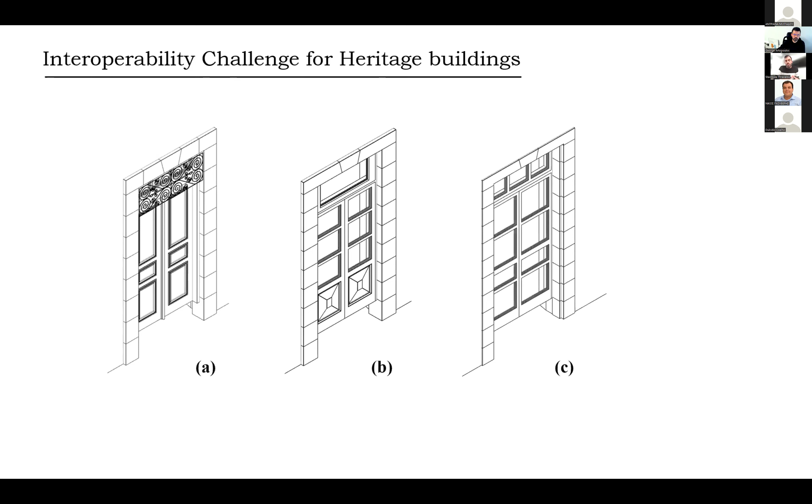So first of all, the first thing we stepped on in heritage assets is the fact that openings differ from semi-glazed to fully glazed or partly glazed, which is something you don't very often observe in contemporary construction. Mainstream BIM native software has a separate function for windows and doors. Here we needed to find a way to either nest a family that includes window and door components, or otherwise manually calculate the U-values for an entire family, and use the schematic types options provided by Revit to register that information into the construction XML file inside the Revit directory.

It's an XML file that someone can easily edit and just add some more lines with the properties of these components. Here we are talking about doors and windows that are composite, that have something unique and complex. The entries include the name of the component, the U-value, and, according to the type of the building element, the appropriate thermal properties.

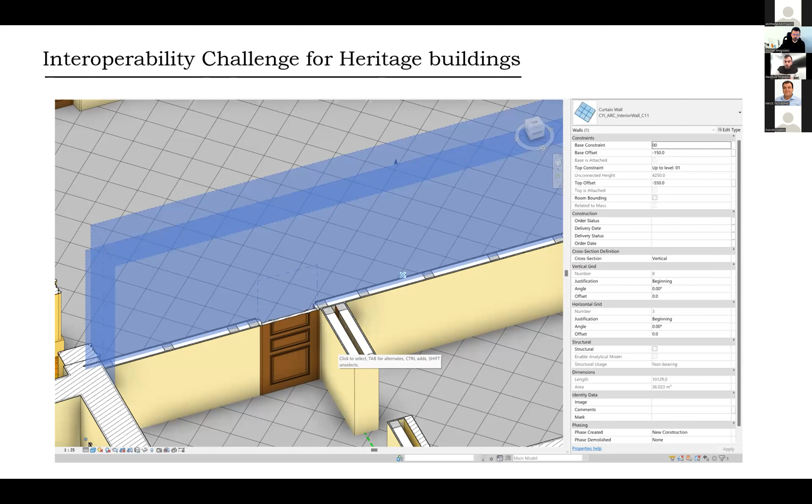This also applies to composite constructions like curtain walls, where again in the XML file someone can use the layer ID property and then add all the material IDs that build up that wall. And in order to make sure that the process will be successful, before exporting, someone needs to cancel the default override of the schematic types under the advanced energy settings in Revit.

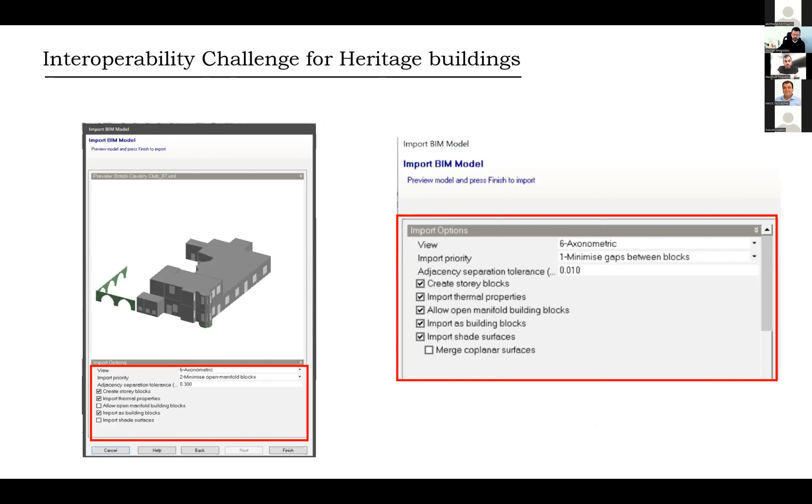Here, just for the audience, we are mentioning some of the basic exporting methods. In this case, we are using rooms or spaces, and in the additional options, the export complexity is simple with shading surfaces. Respectively, in the energy simulation software, DesignBuilder, we are using the minimize gap between blocks option.

In terms of geometry, for contemporary structures and also here for heritage buildings, the two models require a different approach. On the one side, we have the three-dimensional building of the architectural model, and on the other side, we only have the surfaces. While the geometry is translated, the default method that BIM software uses is converting existing walls using the wall center line, and that creates some anomalies in the geometry, maybe some edges, some corners. Principally, this is one of the major issues that people are encountering.

What we are suggesting so far for architects who want to improve their BIM models is designing with energy in mind. So each wall can be edited, or an instance can be created with a different center line that best fits the purpose of the export for the energy analysis, instead of focusing more on the architectural detail.

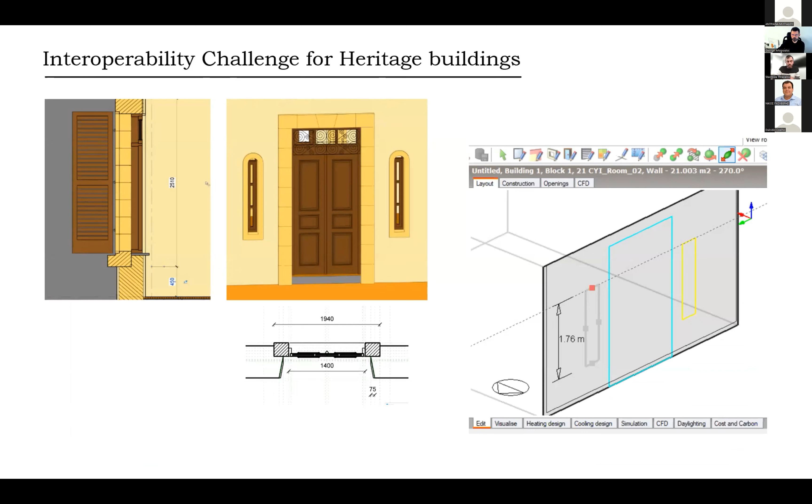Also here with the different openings in heritage buildings, the fact that you have an opaque and transparent envelope in a single opening, someone can either follow the approach of nesting two different families together, or simply using a door family and then manually modifying that opening in DesignBuilder, in the energy simulation software.

Now, our first experience with this went quite well, but we were missing some of the data, and mostly we were missing the occupancy schedules, lighting schedules, HVAC systems, which is also a very important part of the process, especially if someone wants to try different scenarios. The solution that we are thinking on this aspect is using the latest version of DesignBuilder, which has this interactive table of all the data collected.

It can be exported into CSV, which then can be read using the Dynamo visual programming tool that Revit provides, and can be first read and then easily replaced using the already registered data in the BIM model, then exported and then sent back to DesignBuilder. Again, there is no need for manual registration of that information.

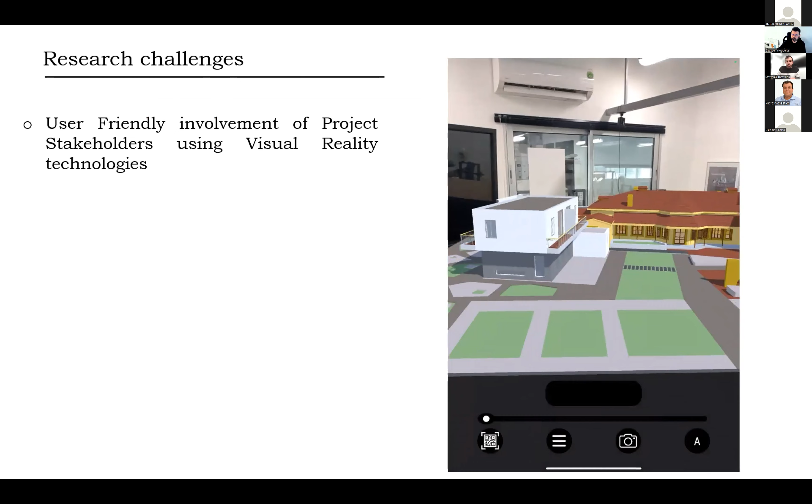Lastly, as Stavroula already mentioned, after the analysis and the simulation results, we're working also on virtual reality tools that can allow the stakeholders or the project clients to visualize the results and the consumption of the building during different periods of the year more easily. For example, here we're drawing a sectional cut of the building, and then the slider below changes the month of the year. So getting a closer look, you can see also the colors changing and the consumption values are demonstrated on the model itself.

Sorry, Christy, if I may add here that the value of this augmented reality tool for us is the way that it has been built from the bottom up. It's not just an application of an existing tool, specifically because it draws data sets from our cloud database. So through the development of this AR tool, we are aiming at setting up the process where the different collaborators could update the models in the database and automatically see the different geometry as well as the different results varying, and can interact with them.